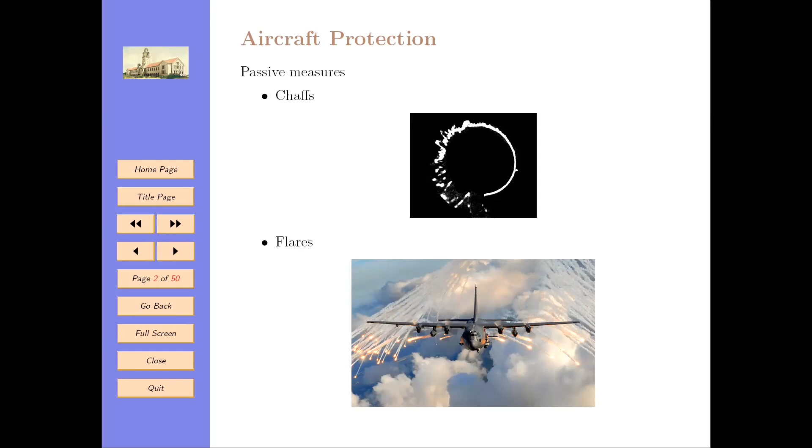Conventionally, aircrafts deploy protection such as chaff, a metallic material thrown out that can confuse the radar signal regarding the presence of the object being detected. The other widely used technology is deploying flares, which can confuse heat-seeking missiles. These are conventional methods of luring missiles away.

If you look at this situation, this is an extension of a classical pursuit evasion problem, where a missile is trying to intercept a target. But here there are three entities involved. The blue team is the point of view from which we look at this problem today - the aircraft, hereinafter referred to as target, defender, and missile. So the objective is to develop cooperative guidance laws for the blue team.

This is a discussion that is not really at the beginning of the guidance theory course we have here, so I will briefly introduce the basic ideas of a couple of these guidance laws, and then we'll go into the details of this specific problem.

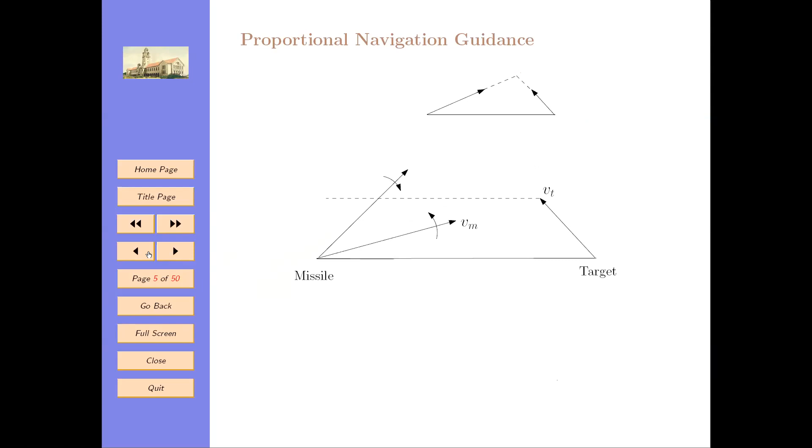Hence, if the line of sight is rotating, the missile should change its heading direction using this proportional relation. So that is the background to proportional navigation guidance, and you can see that it is very easy to implement. The information that you need from your seeker is only the line of sight rate, and if you're looking at lateral acceleration, you'll have to multiply this by the speed, so that should be available from onboard sensors, and hence you can use this guidance law.

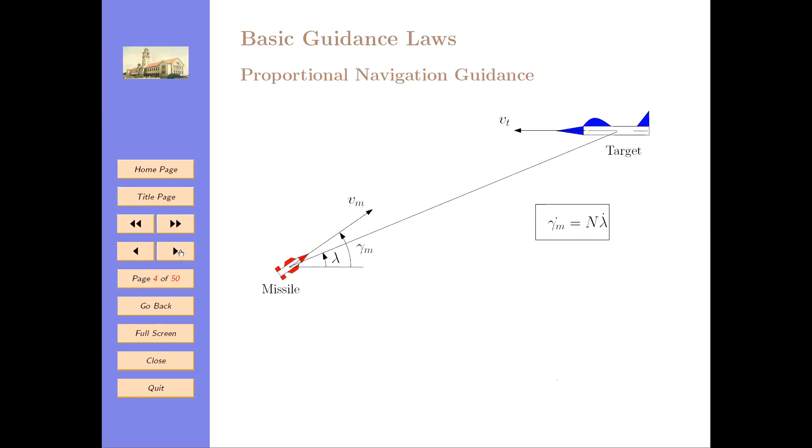The second guidance law of interest here is not really driven by the sophistication of the idea itself, but more from a practical point of view. In the early days, early 20th century, a lot of these missile systems like air-to-surface, air-to-ship kind of missiles, the guidance logic there was that if the missile keeps itself on the line joining the launch platform and the target, then it should eventually intercept the target.

The reason was that all the sensing capability and all that was not really there on the missile, but actually on the launch platform, which could communicate that to the missile. So using that kind of a framework, line of sight guidance was used.

For example, the first guided missile, air to surface missile, Fritz X, also used line of sight guidance, but there the pilot themselves could see the line of sight to the ship and then guide. The control of the missile was with the pilot, and they could guide the missile onto the target.

So here the idea is that the missile should keep its position on the line joining the launch platform and the target, and by doing so it should eventually intercept the target. So these are two pillars of classical guidance theory, that is line of sight guidance and proportional navigation guidance. There is another guidance law called pursuit guidance, but that is not of interest to our discussion today.

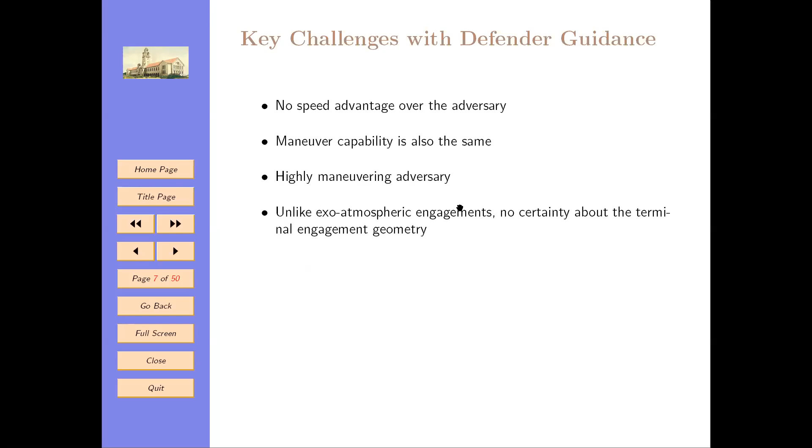So these are some very fundamental challenges. The first question that comes to our mind is, if you ask this to any person who works with guidance laws, they would say, how about using proportional navigation for this problem? The classical analysis of proportional navigation has established some facts, which include that the defender speed has to be at least root 2 times the missile speed for interception to be guaranteed, and also that the defender lateral acceleration should be at least 3 times that of missile lateral acceleration for a guaranteed interception.

So just as we start, we immediately hit a roadblock. Proportional navigation, though it's a beautiful guidance law, doesn't really fit here because of the fact that this is an engagement between vehicles of equal capability.

Now, moving on, I'm just trying to bring forward some notations because there is a fair bit of analysis that we will go through. I'll also give geometric interpretations. You can see these 3 points here: the target, which is the aircraft, defender, and missile, which is the attacker. R denotes the range. So for example, R sub D is the range between defender and the target, and RDM would be the range between defender and the missile.

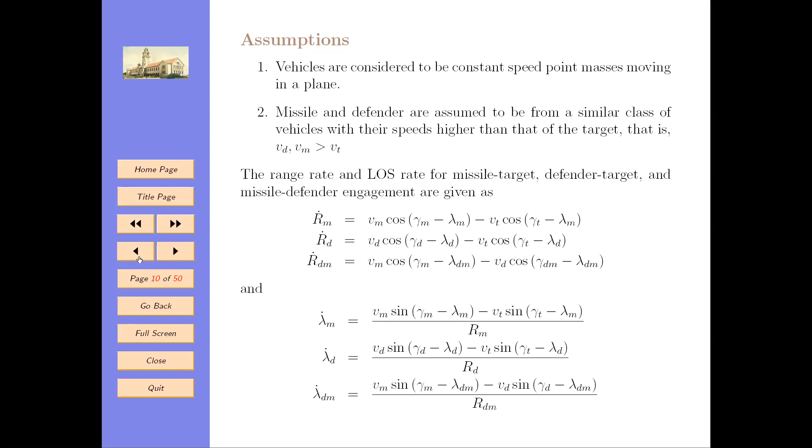Now comes the line of sight rate. Again, for line of sight rate, what we need is the components of velocity normal to the line of sight. So you can just replace the cosine components with sine components, and of course divide that by the instantaneous separation between the vehicles. Using that, you can find out the rate of change of the line of sight angles, the three line of sight angles that we are looking into.

Moving on, how is it that the vehicles change their heading direction? I have already pointed that out, this is using the lateral acceleration. So gamma t dot would be at divided by Vt, and similarly gamma d dot, and gamma m dot would be Am by Vm. Here Am, Ad and At are missile, defender and target lateral acceleration respectively. And there is also a limit up to which these vehicles can apply their lateral acceleration, so they are all bounded.

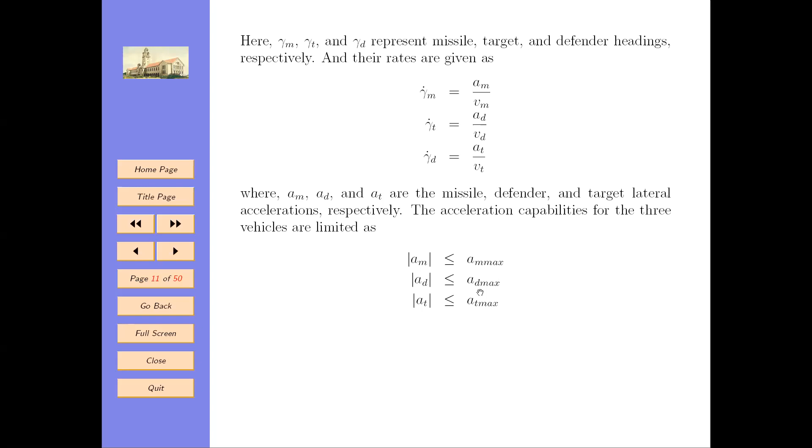Now, this is an extension of the classical pursuit evasion problem. We have seen that, but we have to note down what are the objectives of the three vehicles involved here. The missile's objective is obviously to intercept the target, but it should also evade from the defender. The defender has an objective of intercepting the missile, but it can also do something which can facilitate the target's evasion. The target, on the other hand, has the dual objective of facilitating the missile-defender interception, and also the primary objective of successfully evading the missile.

Obviously, in this case, if the defender misses the missile, then the guidance problem becomes the one-on-one type where the missile pursues the target. That's a much, much simpler situation, but we are not really looking into that. We are looking into the situation where all these three are very much involved.

Now, in the rest of the discussion, I'm going to emphasize the importance of line of sight guidance as the strategy for the defender, and highlight why it works very well. You may feel that why is it that suddenly line of sight guidance is coming, why not any other guidance law? There are some reasons why I picked line of sight guidance law for this problem when I was investigating this, and some of those geometric intuitions and explanations I will try to discuss as we move on.

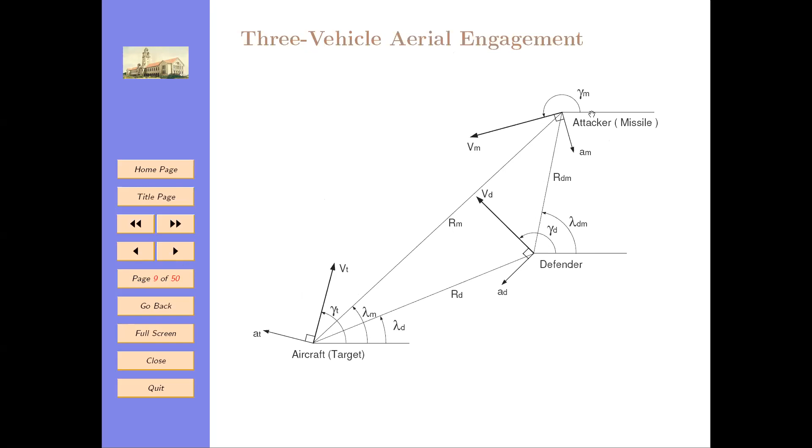But for the time being, please assume that the defender is going to use line of sight guidance. What does that mean? That means that during this engagement, the defender will always be on the line joining the target and the missile. So if you see the generic representation here, I've just moved the defender from this position and put it right on the line joining the aircraft and the missile. So that is what you have.

So all these line of sight angles that we wrote the kinematics about have all become the same angle lambda. Of course, the heading directions still have their different variables. And RD, RMD, RM are the same quantities. The only thing you can obviously see is that R sub D plus R sub MD would give you RM.

So now this is the picture that we have, and let us see how we analyze this situation and get some more results. So lambda is the angle that you have for the line joining the three vehicles as measured in a fixed frame.

What exactly governs the line of sight course for the defender is the locus of all points between the target and the missile, that is RD by RM as an element of the closed set 0 to 1. So that means all these positions right from here up to there. RD is 0 here, the range defender separation from target, and RD is RM when the defender reaches the missile. So it varies between 0 to 1.

It is very easy to note that at the time of launch, the defender is launched by the aircraft. So at the time of launch, RD by RM is 0, and at final time TF, RD by RM is 1, where TF is the defender missile interception time. Please note that we are looking at this situation only up to the point where the defender intercepts the missile, so TF is the interception time for the defender missile pair.

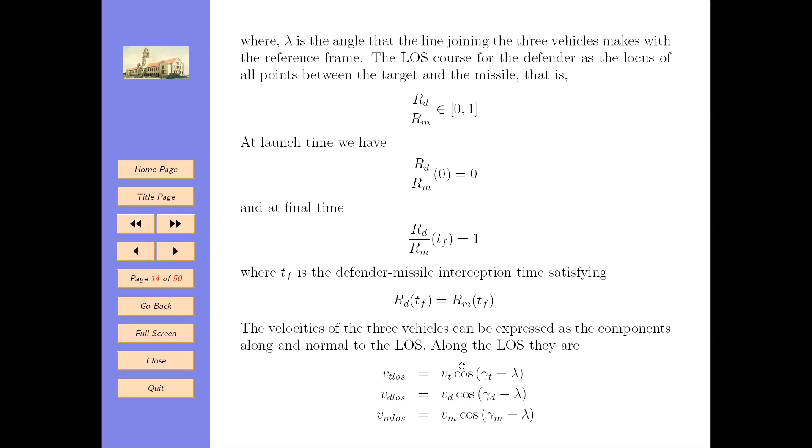There are a few other mathematical notations which are important for us to dive into the analysis. The velocities of the three vehicles can be expressed for analytic tractability as components along and normal to the line of sight. Along the line of sight, you take the cosine components. So gamma d minus lambda, Vd cosine of gamma d minus lambda, would be the component along the line of sight. Similarly for the other vehicles.

Normal to the line of sight, of course, you take the sine components. Now the line of sight rate is very interesting, since there are three vehicles here. If I take the line of sight joining target and defender, then defender and missile, and then target and missile, these three lines rotate at the same rate. So the line of sight rate can be written using all these three ways of expressing it: between the missile and the target, defender and the target, and also the missile and the defender.

The closing speeds also can be expressed using the cosine components. So Rm dot would be the component of the missile's velocity along the line of sight minus the component of the target's velocity along the line of sight. That gives you Rm dot. Similarly, you can compute Rd dot and Rmd dot.

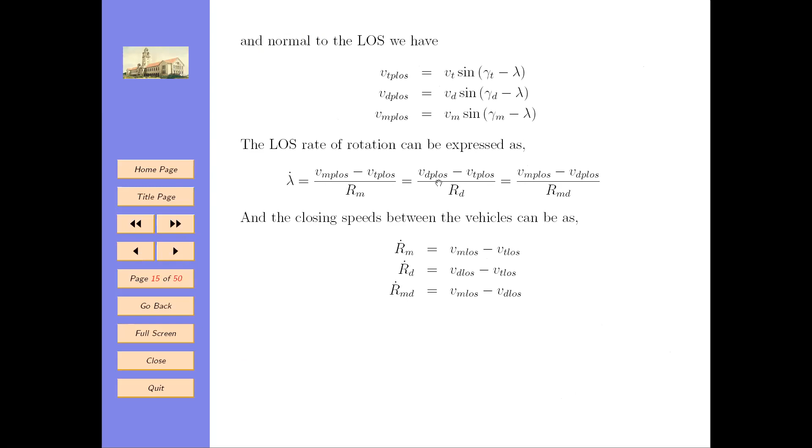So with these first two equations, you can readily express Vd perpendicular to the line of sight, that is the defender's speed perpendicular to the line of sight, as a function of the missile speed perpendicular to the line of sight and also the target speed perpendicular to the line of sight.

Is there a geometric interpretation of this result? Just imagine when Rd is 0, that means Vd PLOS equals Vt PLOS. So how does that work?

This can be seen here: when the defender is very close to the target, its velocity component normal to the line of sight has to be very close to that of the target for the line of sight to be rotating. As it moves away, that angle changes, and finally when it gets very close to the missile, its velocity vector normal to the line of sight should match the missile's component, since that is what is related to the line of sight rate. That is precisely what is happening here.

So as you can see, if you put Rd by Rm as 1, it becomes Vm PLOS. Of course the proof is straightforward, but the idea is simple: since it can vary only between these two quantities in this linear fashion with respect to Rd by Rm, the maximum possible requirement that the defender has as its speed normal to the line of sight is always between the set minus Vm to Vm.

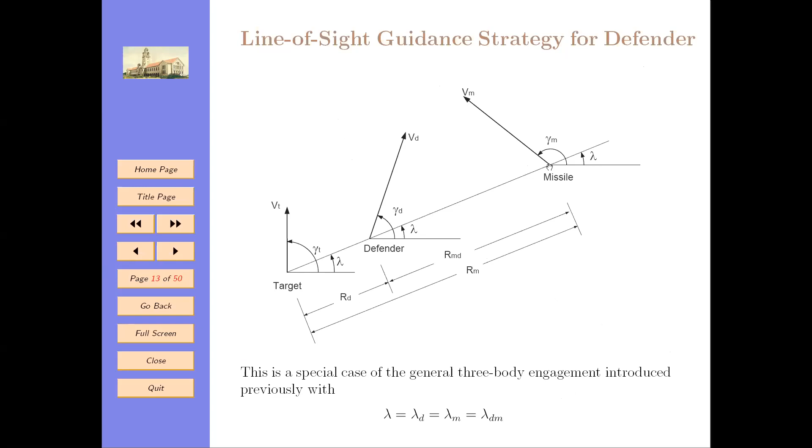You can also imagine this by the situation where this angle is gradually increasing as you go away from the target towards the missile, and the exact component matching is only towards the end of this trajectory. So that is an important result: speed wise, line of sight guidance is a reasonable idea. There is no problem there.

Now comes another important result, which talks about guarantee of interception. If Rm TF is finite, so for proving this result there is an assumption that the final distance between the missile and the aircraft is finite, which is obviously the case but required for the math, then the interception between the missile and an equal speed defender is guaranteed for all attack geometries and missile maneuvers. Let us see how we construct this proof.

We have classified the engagements into two categories: one where the Vm PLOS at any instant is greater than Vt PLOS, meaning the missile's velocity normal to the line of sight is greater than that of the target. If that is the case, then since Vm PLOS is greater than Vt PLOS, and Vd PLOS varies in that range, it will obviously be smaller than Vm PLOS. So it will be between these two quantities, and this is smaller than that.

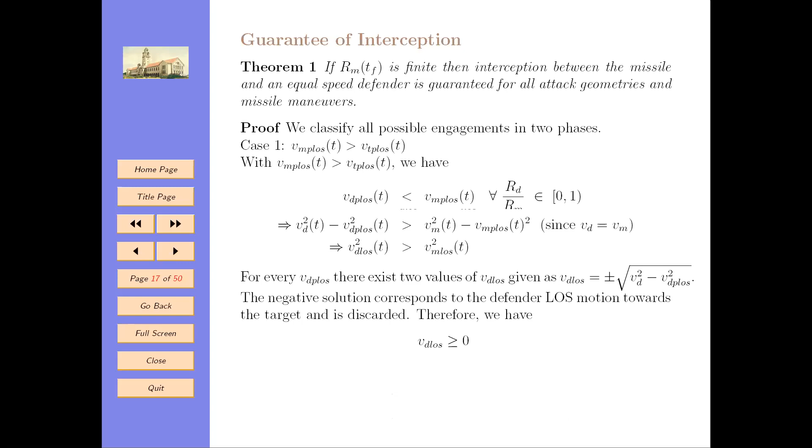So with these two cases, what we conclude is that the interception is guaranteed if the defender follows line of sight guidance. In some sense, you might imagine that we have got all the important results by now, and this may look like a happy ending of this quest for a guidance law. But all of you know that when you look at interception and speed requirements, that is fine.

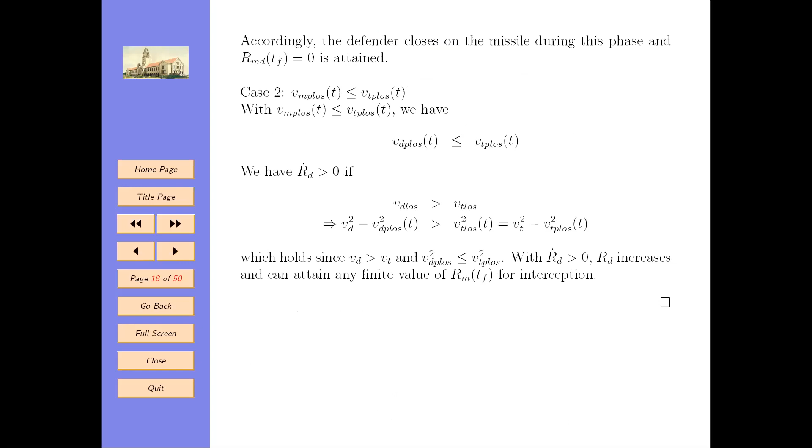The most important consideration for a guidance law is essentially the lateral acceleration characteristics. So for considerable time forward, I am now going to get into the analysis of lateral acceleration relations and then establish some very important results that will show why line of sight guidance is such a good idea in this case.

All right, before I do that, for the lateral acceleration requirement, first of all we need to pick the line of sight rate between the missile and the target. So just as one of those relations, of course you could have picked any of the three. You can differentiate this equation and then you will see all these terms coming up.

You will start noticing Vm times gamma m dot, so that would be Am, the lateral acceleration for the missile. Similarly, Vt and gamma t would give you At.

The other part is where you have lambda dot here and then another lambda dot here, but there is a Vm cos gamma m minus lambda and Vt cos gamma t minus lambda. So that would give you another minus r lambda dot, so that term would go to the other side, and this whole term will become

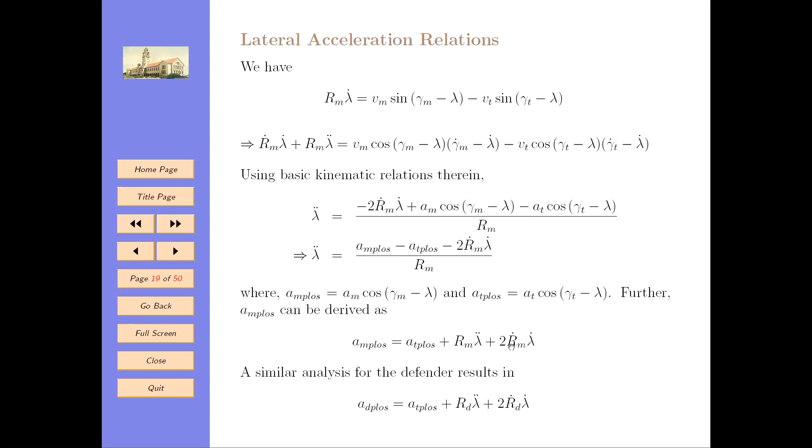So this, I took one pair of line of sight relation. You can also take the other relation, for example the missile-target line of sight and also the defender-target line of sight. So finally, using this equation, you can write AMPLOS as a function of ATPLOS. Similarly, for the defender, you can write it like this.

So at the end of it, from the last two equations, you can substitute for lambda dot from one relation to other, and finally arrange these terms to obtain the lateral acceleration relationship for the defender. This is the defender's lateral acceleration normal to line of sight as a function of the target's acceleration normal to line of sight, the missile's acceleration normal to line of sight, and another term which is a function of lambda dot and other quantities.

So this was a bit of maths, but what do we notice here? You can see that when RD by RM is 0, you are just at the time of launch. So the missile's lateral acceleration does not really affect the defender's lateral acceleration, because the line of sight kinematics is dictated. This is like holding a stick from two ends, so it is the end that you're near to that more affects your motion than the other end.

So that could be a rough insight into what is happening. But as you get closer and closer to the missile, obviously this term then dictates. So the defender lateral acceleration component normal to the LOS is a weighted sum of target and missile lateral accelerations normal to the LOS, added to a component proportional to the LOS rate.

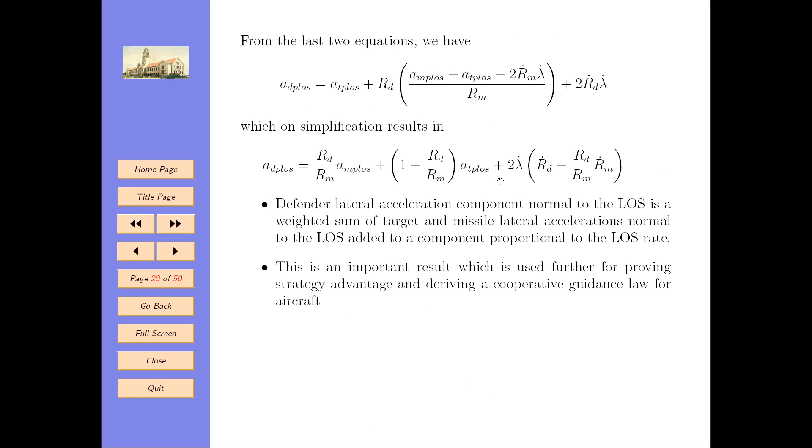So this is now set up, but beyond this, there are certain conditions. You can take the partial derivative with respect to Rd by Rm, and you can deduce that with respect to Rd by Rm, this quantity is always increasing. If this quantity is always increasing, then we can substitute Rd by Rm as 1 in the expression and find out the limit. For example, in this case, if you put Rd by Rm equals to 1, finding the maximum value...

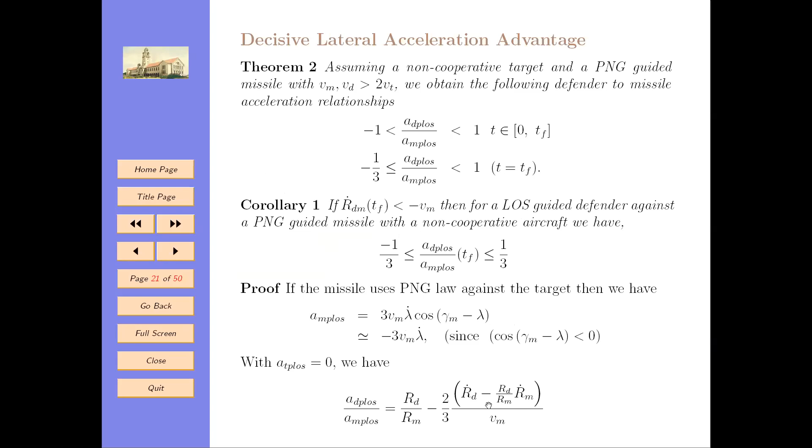And you assume that the closing speed between the defender and missile is positive, which is a reasonable assumption, the ratio is less than 1. But moving on, you can also see that if you look at the minimum value, that would be at Rd by Rm equals to 0, which is a slightly simpler expression, as you see here, because this would become 0 and then this would also become 0.

And you can get this result which goes by that. But then you can again look at the maximum value that you got and get the bounds just by using the kinematic relations that we already have. So what we can show by these relations is that ADPLOS by AMPLOS lies between minus 1 by 3 and 1.

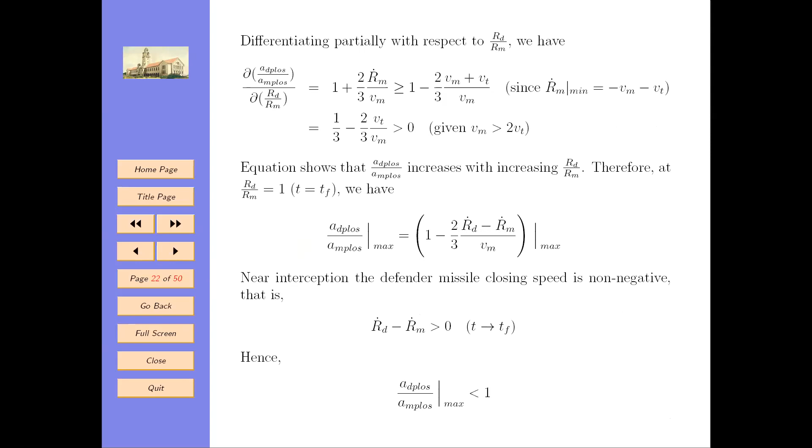Moving on, if you look at this slide, this quantity we assume is greater than 0, meaning the defender and missile are closing at a positive closing speed, but it can actually be much more than that. So if you put that information also in here, what you can show is that ADPLOS by AMPLOS at the final time is indeed between minus 1 by 3 and 1 by 3.

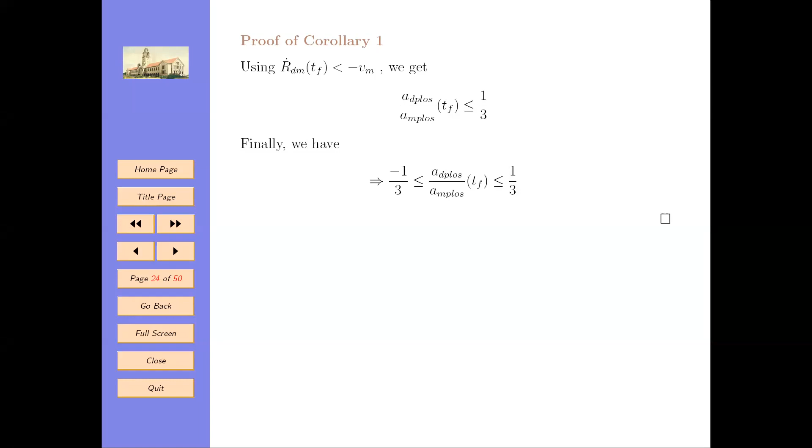We do have more information on this result. The maths part is here, and I also have a reference at the end of the talk, so you can have a look at it. But I would like to emphasize that proportional navigation, for example, in intercepting a maneuvering target, would have an acceleration which is 3 times that of the target, and here it is 1/3 of that. So this is a tremendous result in terms of the problem we are trying to address.

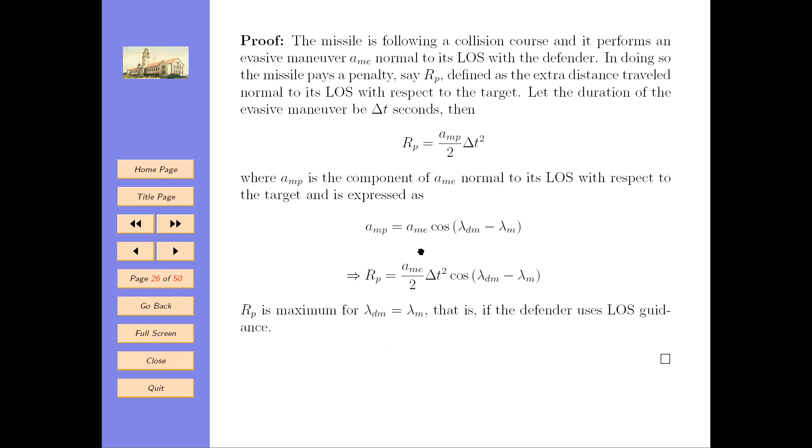So the proof is also very simple, again based on the same thing: the distance traveled normal to the line of sight. Whatever penalty you pay is assumed to be governed by AMP, and AME and AMP become equal if this angle is 0. That will happen when the defender is right on the line joining the two. So we can see geometrically why line of sight guidance is also an intelligent option, since it will now make the missile pay a heavy penalty if it is trying to evade from the defender.

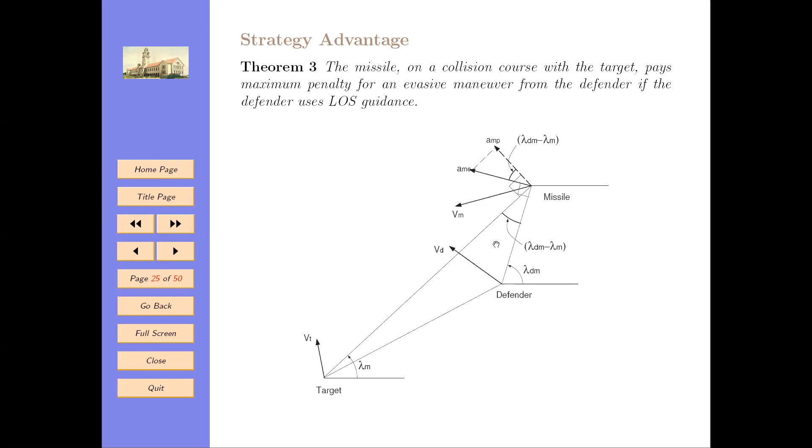Okay, so the maths part, some of it we have done fairly rigorously, some of it we have only seen the gist. But what I would really like to discuss with all of you is this picture, where we can see why line of sight guidance gives these tremendous results.

Now just imagine that this is the situation between missile and the target. The missile, of course, would like to close this gap because its aim is to achieve a collision course with respect to the target. So this missile will now turn towards this direction, anticlockwise.

Now, if the defender is using line of sight guidance, the beauty of it is that it never tries to close its collision triangle with respect to the incoming missile, because its heading is governed by the line of sight guidance principle, which says hold on until you get too close to the missile. For example, if the defender was very close to the target, then its velocity component normal to the line of sight would only be equal to that of the target.

So it is not immediately going for the interception, but rather waiting for the missile, and the missile is anyway turning towards the target, so it is already closing this collision triangle with respect to the defender. So this is something inherent, not that we have put extra logic here, but this is an insight into why line of sight guidance works so well.

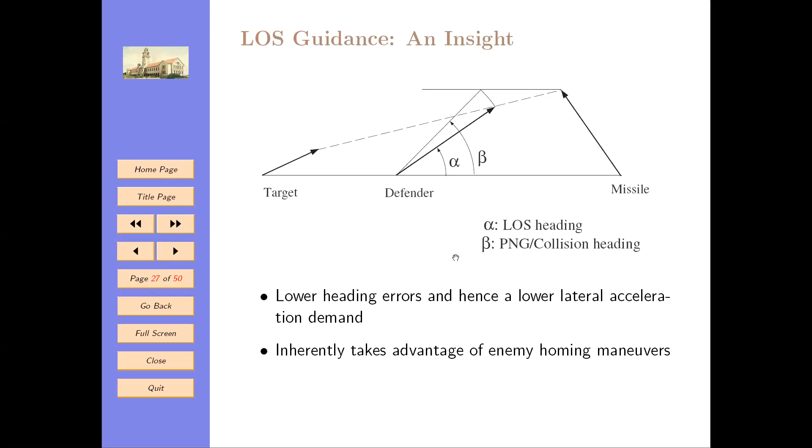So it will be chasing that situation. But here it's beautiful, because whatever effort the missile is doing is only helping the defender, and the defender is just keeping the line of sight course, and it will only close alpha equals to beta when it gets very close to the missile. So these are lower heading angles from the line of sight, so the lateral acceleration is lower. And the bigger point is that it inherently takes the advantage of the enemy homing maneuvers. So this is a geometric insight to why line of sight guidance works so well here.

As far as implementation is concerned in any engineering system, the ideal kinematics, if you want to implement, you need some controllers, tracking controllers. So again, for this line of sight guidance for defender, you will have to add a compensator which can give you a more realistic sort of tracking logic. But this is just for that.

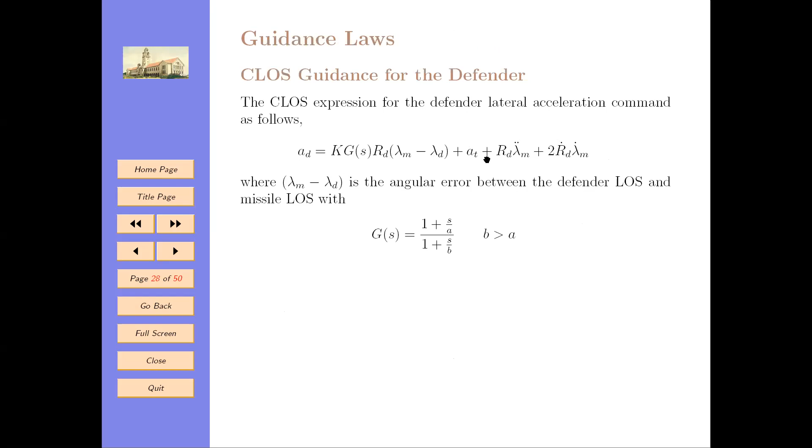There is also another result that I wanted to discuss with respect to the cooperation between these two vehicles, that is the blue team, the aircraft and the defender missile. The premise to this analysis is that the aircraft is now going to use a negative quantity times the line of sight rate, because it is trying to evade from the missile. So this is the cooperative maneuver that the aircraft wants to use.

Now this cooperative maneuver will induce maneuvers on the missile, and that will obviously induce more acceleration on the defender. So what exactly is the idea? The idea here is that the aircraft should maneuver so that it evades from the missile, and now the missile will have to maneuver more, so it will bleed energy.

At the same time, it is important that this cooperation is sensitive to the fact that the ratio of ADPLOS and AMPLOS is still kept less than 1. So that is the premise for this analysis. Again, it's a straightforward analysis. You can just use the same relation between ADPLOS and AMPLOS and plug these values. ATPLOS now has a closed form which can be substituted here.

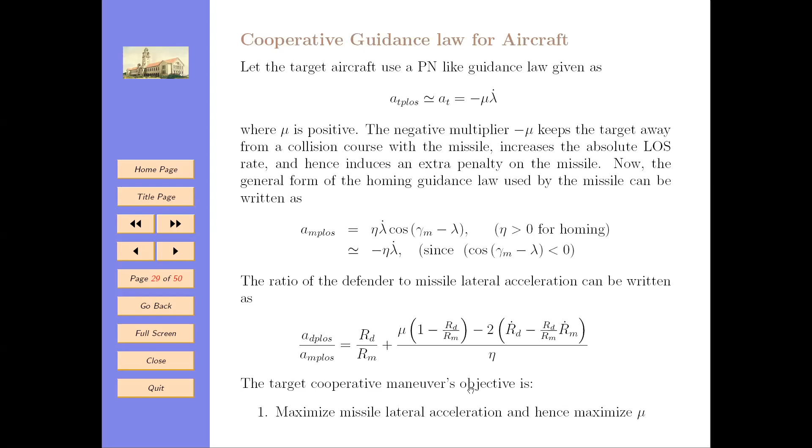And what we are going to do is maximize mu while keeping ADPLOS to be less than 1, ADPLOS by AMPLOS. So hence we solve for mu, and then again this kinematic relations can be easily reduced. Here you have another quantity, but since Rm itself, Rm dot is a negative quantity, so for the minimum we can certainly put that bound.

And 1 minus Rd by Rm, again if this becomes close to 1, this would be a very high quantity, but if it is close to 0, we can get the lower bound. So we get 2 Rd dot plus eta, which is the navigation gain that the red missile is using, which is a positive quantity.

So finally, we can come up with a mu, which is 2 Rd dot, which is coming from this optimization, and then that is used as the cooperative guidance law by the aircraft.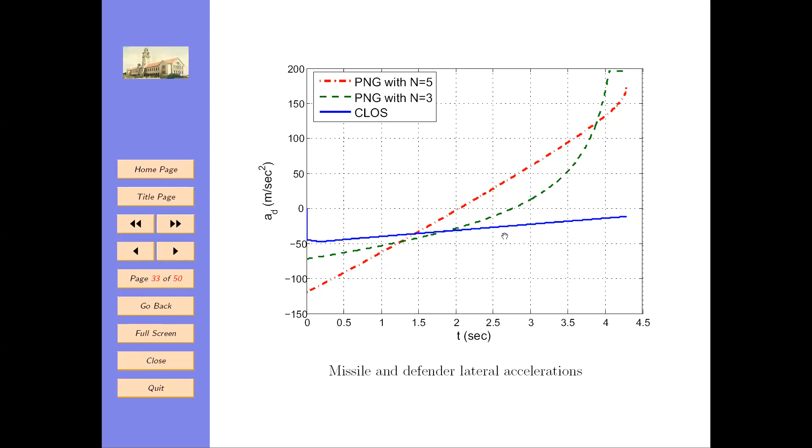With n equals to 5, the initial acceleration is high, but it is able to manage. But if you just use proportional navigation with n equals to 3, the lateral acceleration actually saturates around 20 G. The line of sight guidance gives way superior performance here.

This is the AD by AM analysis that I wanted to show. You can see here that for line of sight guidance, command to line of sight guidance, AD by AM indeed gets very close to 0.33. This is the bound that we had deduced.

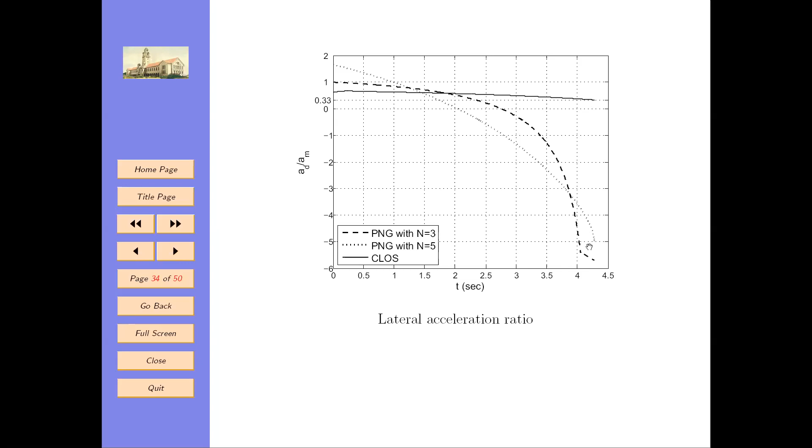And you can imagine how bad the situation is if you use proportional navigation, because that is now close to -5 or -4 times. So these are just the other results, very straightforward results.

You see the capture regions for these, because there are various different attack geometries that can be considered. So for a side-on attack geometry, which is essentially this, the missile can come from any angle between say 90 degrees to 270 degrees.

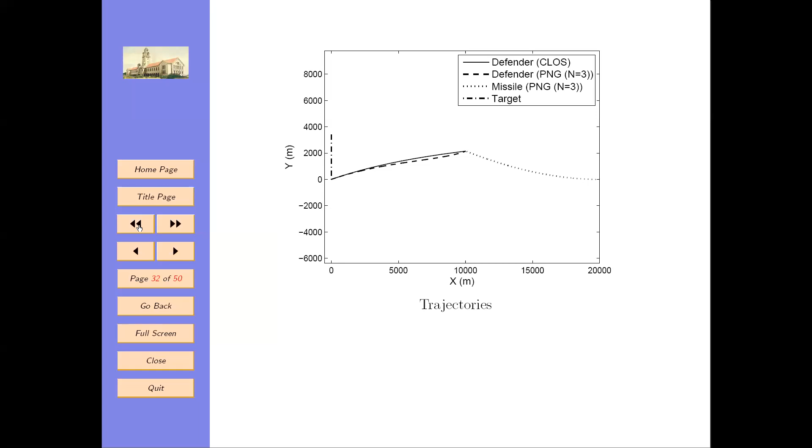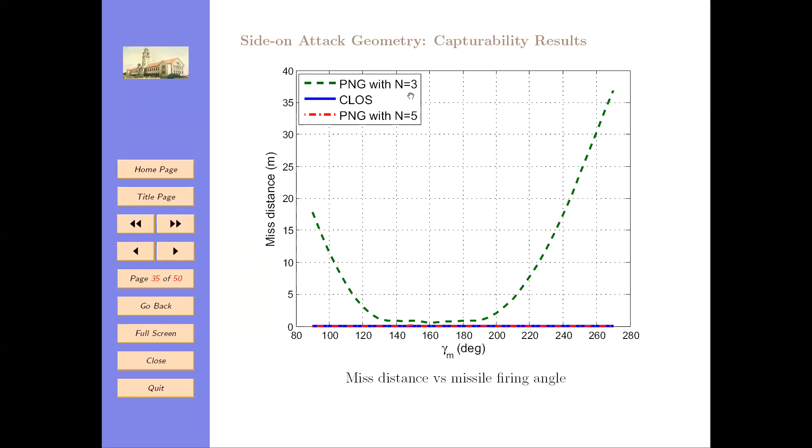All that is done here, and you can see that the miss distance is 0 for PNG with n equals to 5 and for line of sight guidance. PN with n equals to 3 doesn't work that well.

But the control effort, which is the integral of AD square dt, is minimum for the line of sight guidance. That trend continues. Of course there is relative difference, because head-on geometries are a little difficult since the closing speeds are higher, so the capture regions shrink.

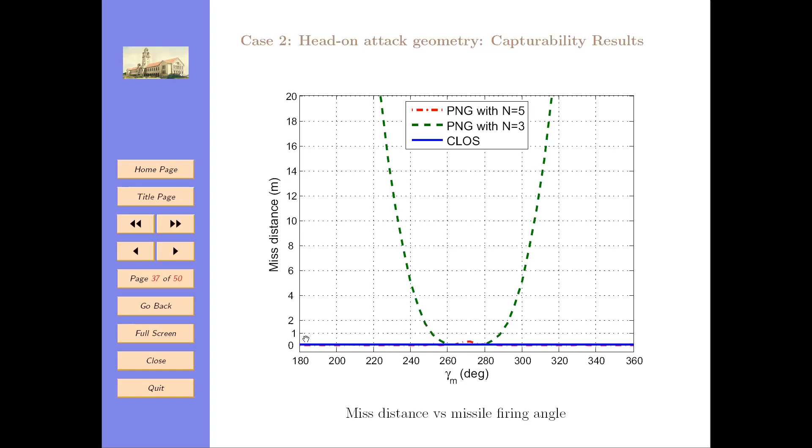But for line of sight guidance, it still works well. Total control effort also, line of sight guidance gives you a little lower - I mean significantly lower - as compared to the other two.

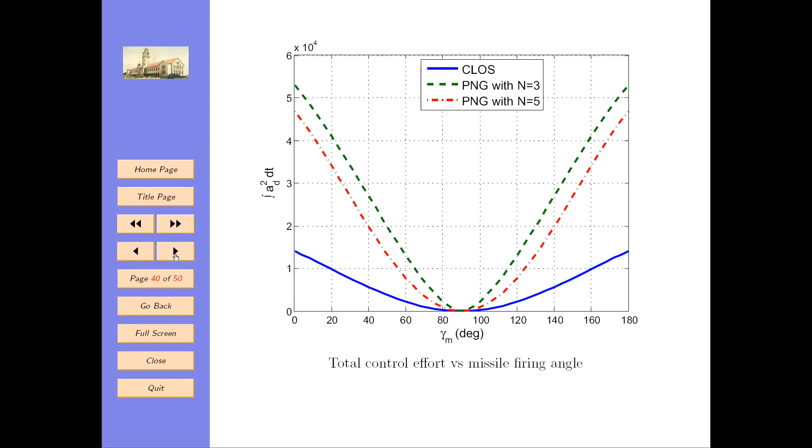Then similarly for the tail chase, again the control effort is minimum for line of sight guidance. This is a simulation that I have which highlights the cooperation between the vehicles.

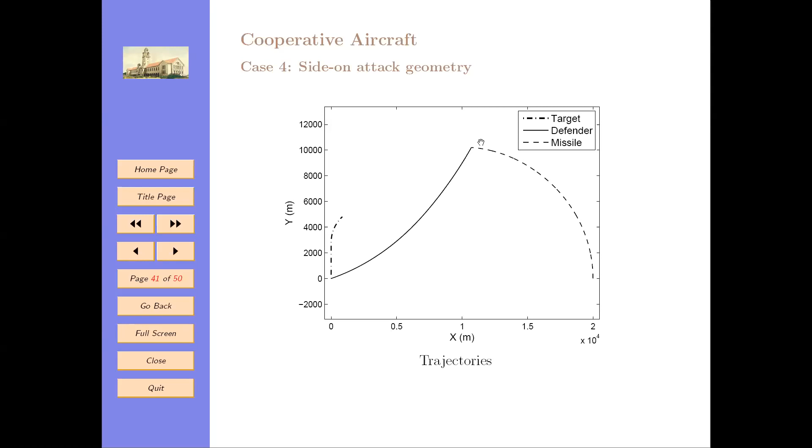What the aircraft does here, it is a similar situation that we had, at some point in the engagement it starts this evasive maneuver. Then you can see this missile coming in, and because of this maneuver, this missile now turns more steeply towards its left, and that actually in some sense helps the interception between Defender and the missile.

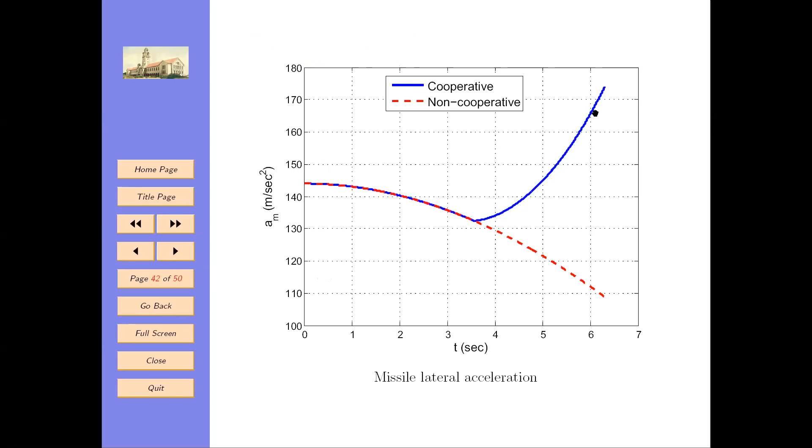So this is the missile lateral acceleration. Once the cooperation starts, the aircraft maneuvers, and the acceleration of the missile also increases. However, for the

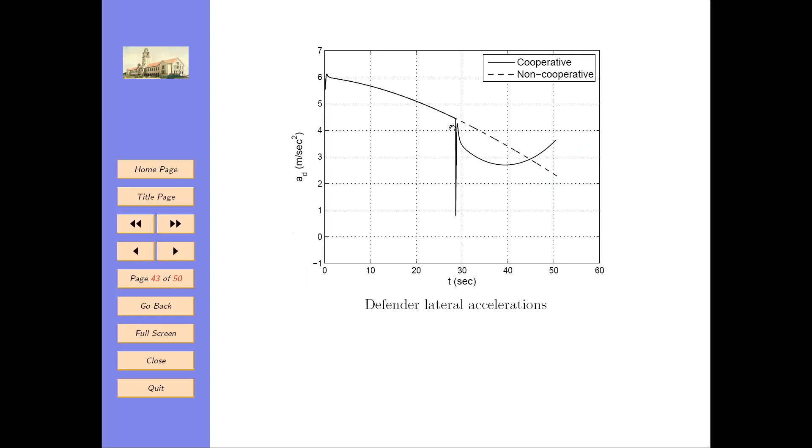Defender lateral acceleration, of course, it also increases, but it is noteworthy that it tries to maintain the ratio below 1. So that is the idea of that optimization.

So this is how this looks like. This is aircraft's maneuver - just after a certain time, it takes this maneuver.

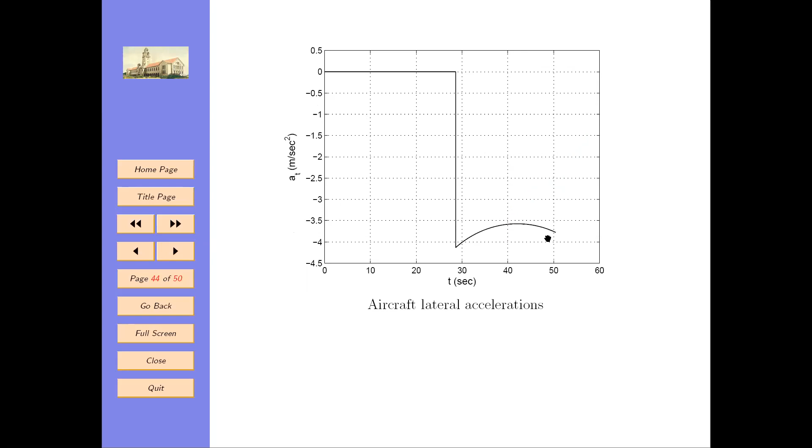If you see the effect of cooperation on the integral ratio of integral control effort, then you can see that when you have cooperation, you gain a lot in terms of AM square dt integral divided by AD square dt.

And please note that for aerial engagements, energy bleeding is a fundamental consideration, and hence if this ratio is high, then the incoming missile is losing the advantage very fast.

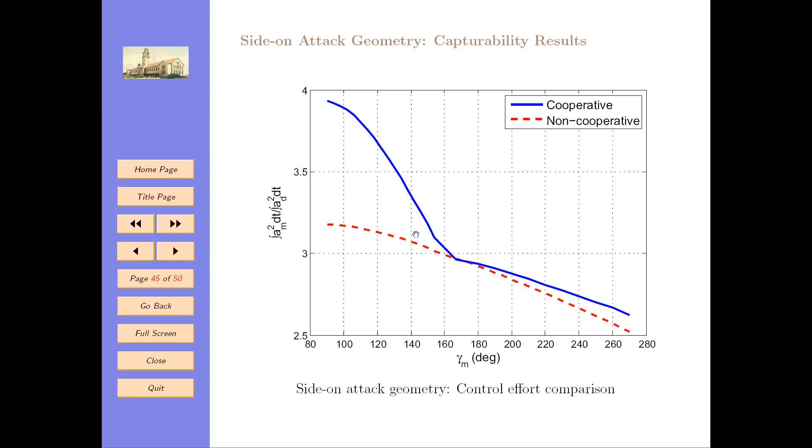Similarly, for the other attack geometries, we can see the advantage is still very much there.

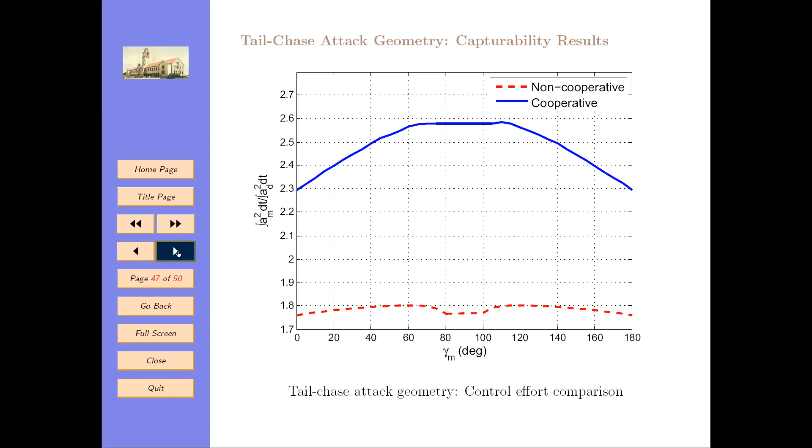All right, so I would just like to conclude here and take some questions that would be more worthwhile. So what we have looked at is line of sight guidance as a prospective guidance law in the 3 vehicle engagement scenario.

We have seen that it gives you a lot of speed and lateral acceleration advantage even when the aircraft is not maneuvering, but if it cooperates, you get even better results. We looked at very quickly the 3 standard attack geometries: side on, head on, and tail chase.

And both by analysis and simulation, we have shown the advantage, and the aircraft considerably increases the missile-to-defender total control effort by using the cooperative guidance law.